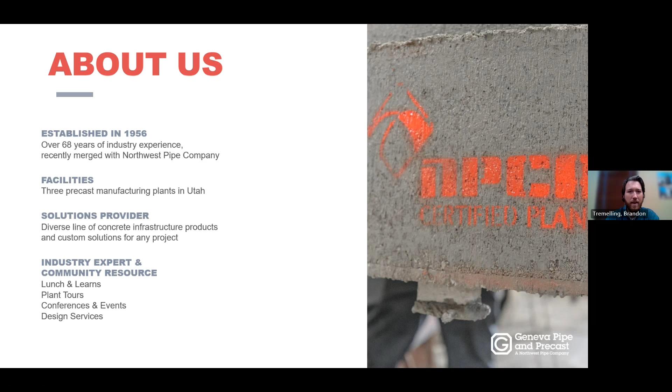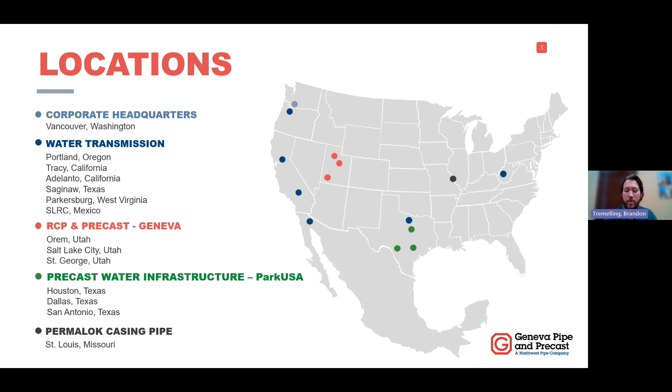To get started, I wanted to mention a little bit about Geneva Pipe and Precast. We are a precaster that recently was acquired by Northwest Pipe. We've been around for nearly 70 years in the industry, providing various precast concrete solutions as well as innovative technologies to accompany some of that precast infrastructure. We are part of a much larger company spread across the United States, which provides interesting opportunities for us to collaborate with other engineers and agencies from around the country that may have unique challenges we don't normally deal with, providing opportunities for additional growth and innovation.

Today we want to talk specifically about innovation in the area of concrete corrosion. The portion I'm covering is specific to the science of concrete corrosion, the H2S or hydrogen sulfide corrosion that eats away at concrete. We'll talk about the impact of this problem in our industry, as well as more historical approaches for preventing and possibly rehabilitating structures that have been affected or may be affected by this problem. At that point I'll hand the presentation to Elena, who will talk about innovative advancements for both new installation and rehabilitation of existing infrastructure.

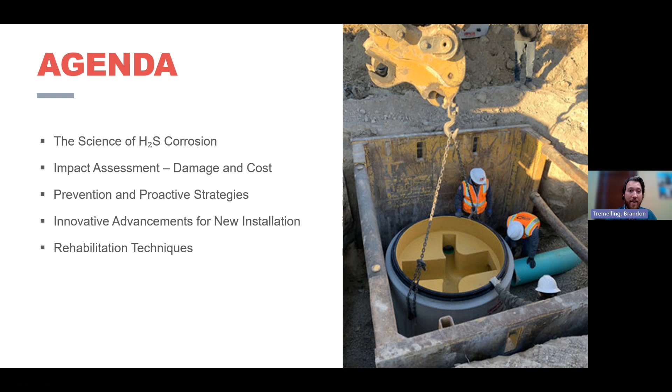And with that, I'm going to jump right into it. So microbiologically influenced concrete corrosion is first and foremost a mouthful, I like to say. We generally condense it down to the acronym MIC, which we'll primarily be referring to it as from here on out. It is the leading cause of deterioration in concrete sewer systems. It's not necessarily indicative of poor design or anything wrong with the wastewater makeup itself, but it is a natural process, and as a natural process it needs to be planned for, inspected for, and sometimes we do things to try to address this problem.

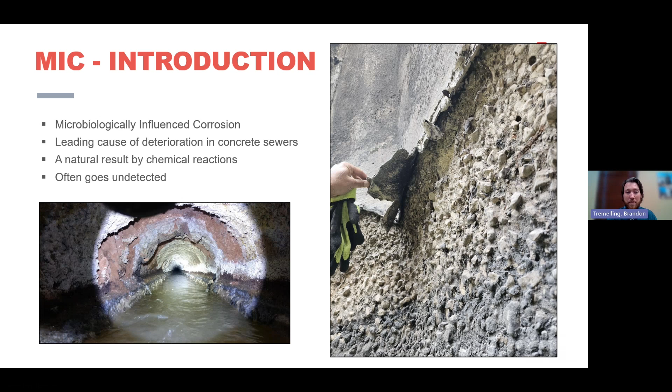On the surface level, as in that photo to the right, you can see higher up on the wall it looks like the method used to protect this concrete structure looked fine on the surface, but until you peel it back and look underneath, sometimes we get a situation where a Band-Aid solution may not be the right approach. So it can sometimes go undetected, which leads to greater problems.

Now the actual chemical process that takes place is that the microbes inherent to the wastewater accumulate in the biofilm under the water line. In that biofilm, they have all the time in the world to break down the organic carbon native to the wastewater and produce acids. Those acids, through various factors, can become airborne. And once airborne, they react with oxygen and moisture to eat away at the components of that concrete structure.

That process eats away the concrete layer by layer. In this photo you can see almost little sheets of concrete in that deteriorated pipe, showing how layer by layer we can eat away at the wall thickness of our structures, eventually exposing the reinforcing steel and possibly leading to collapse of the structure, which can lead to all sorts of problems, including health concerns, safety, and so on and so forth.

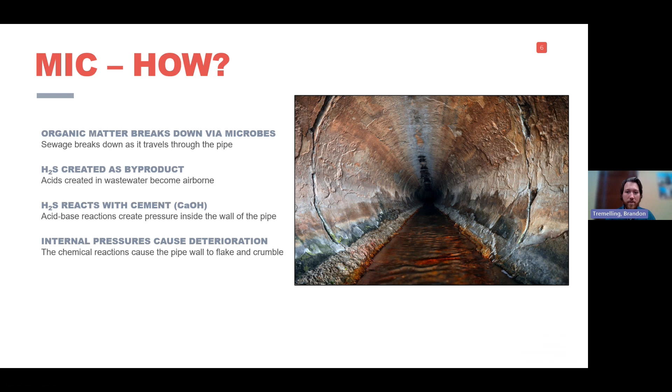So like I mentioned, there are various factors that can cause these acids in the wastewater to go airborne and then attack the concrete. The first and foremost of those factors is heat. The hotter it is—and when I talk about heat, I'm not talking about drastic temperature fluctuations, I'm talking about slight increases that bridge that gap to the energy of activation, or the required energy for these chemical reactions to take place. So if we have slightly warmer wastewater, we're more likely to see those acids go airborne.

The next one is turbulence. If we're aerating the water, that's going to cause those acids to get swept up into that aeration and then enter the atmosphere. The longer the transit times—this one's a little tricky because it's often out of our control—but the longer the transit time, the longer those microbes have to build up the concentrations of the acids in the wastewater and also in the air in the pipe.

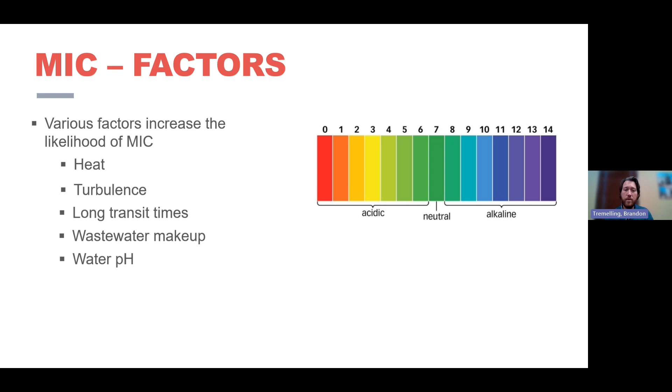Now that we've covered a little bit of the science, I want to spend some time talking about actual disasters and case studies that demonstrate the impact of this problem.

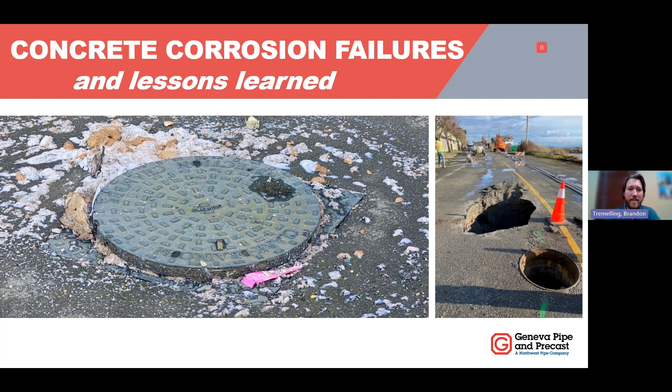The first one I want to talk about is a relatively large disaster as far as sanitary sewer overflows go, and that is the Jackson, Mississippi disaster, where a lift station or pump station failed after a concrete pipe collapsed due to corrosion. The overall volume of wastewater that spilled was 19.7 million gallons, which is only what was measured—it wasn't the total volume, just what they could account for when they found that the wastewater was flowing directly into the Pearl River that runs through Jackson, Mississippi.

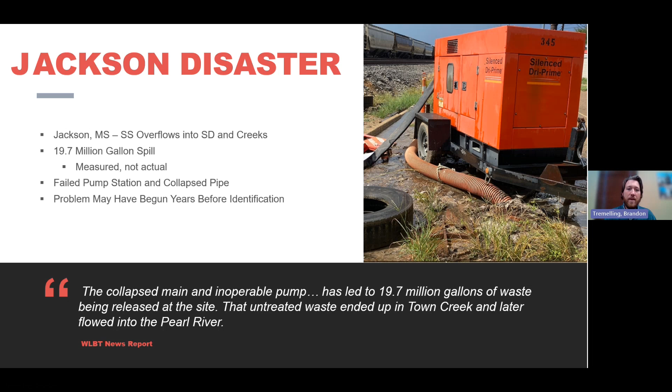Further in my research of this specific case study, I found this quote, which says that in 2020, more than 520 million gallons of SSOs occurred. And I don't know if you call this progress, but two years later they'd cut that down to only 216 million gallons, which is by any measure an environmental disaster.

Now, what had taken place was that because Jackson, Mississippi was being more reactive than proactive in the work they were doing to maintain their system, they quickly got to the point where they realized they could not keep up with the disasters as they were taking place, and very quickly ran out of money. When I say that, there was a study that came out several years ago by FEMA showing that for every $1 of proactive care spent, it's equivalent to $6 of reactive care.

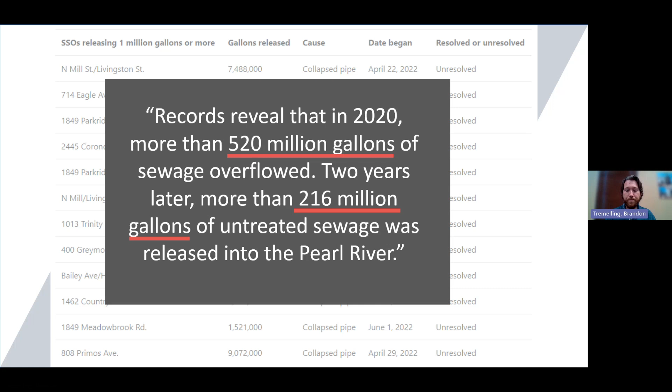So in cases like Jackson, Mississippi, where there were all these disasters taking place and the great increase of cost to deal with those disasters, the city ran out of money and lost the ability to maintain their own system.

More locally and on a smaller scale, which might be more relevant to engineers in rural areas, this was a photo I took myself at the headworks of a local wastewater treatment plant, right after I gave a presentation much like this one. I turned to a group of operators and asked, how many of you have seen MIC in your system before? This was a group of seasoned operators, and they all looked at each other and at me and said, we haven't.

And I said, really? How much of your system is concrete pipe? And I'm not just talking about manholes, I'm talking unlined concrete pipe. And they said about 80%. It wasn't until one guy at the back said, maybe I've seen something like that. So we walked right outside to the nearest manhole, since it was at the treatment plant, popped open the lid, and saw what you see here.

Just to be clear, for those not super familiar with concrete infrastructure, concrete isn't meant to curl away from the walls like that. That's definitely a significant case of corrosion. This is an example I like to highlight because if you're not looking for this problem, it's easy to miss. In this case, these operators, even though they'd been dealing with concrete infrastructure in their system for decades, hadn't realized this was impacting the resiliency and sustainability of their infrastructure.

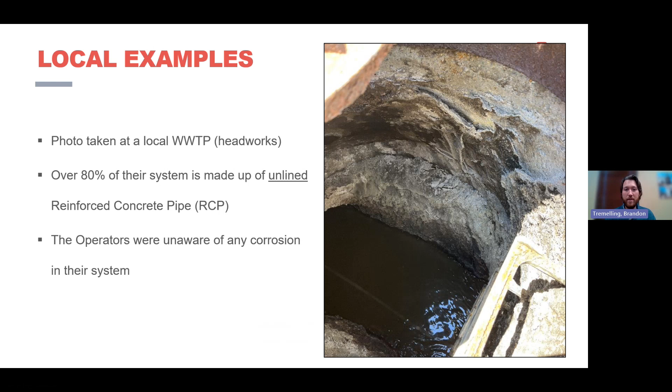So mentioning costs and these studies by FEMA, my company put together a research study some time ago where we analyzed different methods to treat this problem, either through prevention, protection, or things like that. I've left the units off of this, but I want to invite you all to think for a moment about what it means when we use the phrase life cycle cost.

If we're putting in a system or component that we expect to last for the lifespan of the infrastructure it's connected to, oftentimes we look at infrastructure with maybe a 100-year lifespan. For concrete, we generally look at a 100-year lifespan. So if we're putting in a structure that has the possibility of experiencing corrosion and degradation, then whatever we're doing to prevent it from corroding and deteriorating should probably also last 100 years.

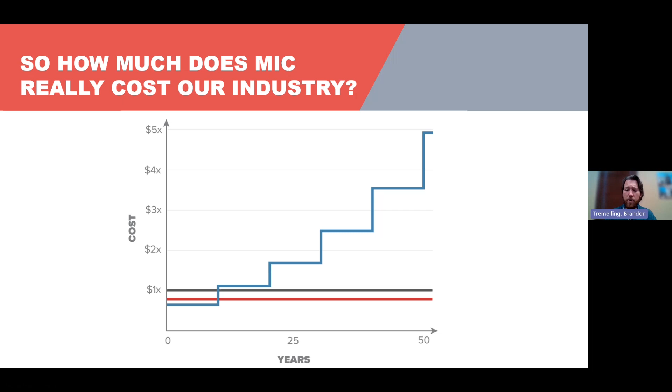Now, in trying to quantify some of these things, my company, looking for solutions, decided we wanted to identify how big of an impact this is to the US market, for example. So just as a quick, more rhetorical question, think to yourselves: how much would you guess the US spends annually on the rehabilitation and replacement of concrete sewer pipes? As you think about that and the scale of it, even $4 billion is a pretty enormous number.

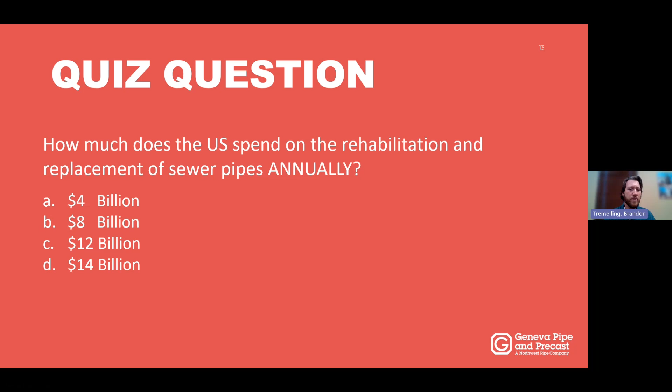And to answer this question, we did what any modern scientist or research engineer would do, and of course we turned to Google and found research studies from all over the world, from Canada, Austria, China, and we were rather surprised to find that here in the United States, it's a $14 billion industry dealing with the rehabilitation and replacement of deteriorated sewer pipes. So a massive problem that we decided we wanted to try to be a part of, to address and provide solutions for our industry and local markets.

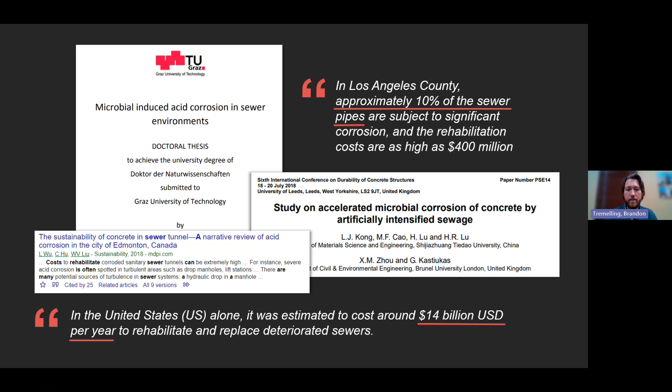Looking specifically at this research study we were working on, we identified a few standard approaches to treating this problem. Probably first and foremost are field-applied coatings. Also, polymer concrete has seen a more recent rise. And finally, lined concrete, which Elena will cover more in depth.

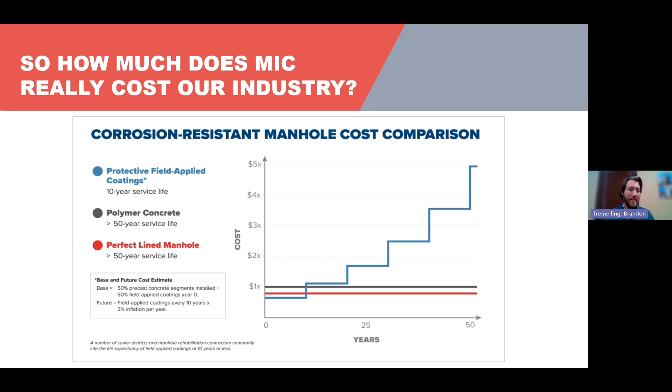But I want to introduce this concept now where we talk about life cycle costs. If we're trying to put a component of our system in, are we making those decisions based on what makes the most sense for the lifespan of the structure? Because at Geneva Pipe and Precast, our goal is that if you're going to put in a new piece of infrastructure to address a problem, or rehabilitate a structure that's had a problem, you should only ever have to do that once.

So, looking at corrosion, how do we identify if we're seeing corrosion in a system? Now, there's a few telltale signs.

Going back to this photo that I took, if you see white or black discoloration, white is actually the formation of gypsum, which is the byproduct of the concrete corrosion. Black is the accumulation of sulfides. So in this photo, you can see some white areas, some black areas.

If you also see yellow, that can also indicate some sulfurous compounds. The smell of rotten eggs indicates septic conditions that really cause little microbes to thrive.

Finally, if you're seeing flaking or pebbly or curling textures, a kind of rough concrete surface, that's not necessarily a problem. But if you're seeing some of the aggregate or gravel exposed, that indicates there has been some degradation of the concrete and that wall thickness is starting to get eaten away. So that also can be an indicator.

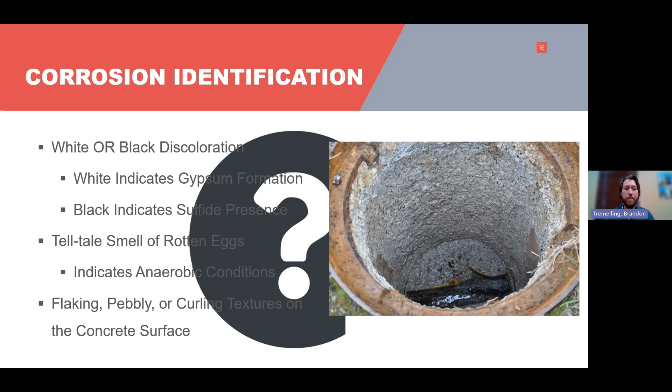Finally, here's a video that I also took of a rather severely deteriorated manhole where truly just with the brush of a hand, this concrete is just falling away. So it can get to some pretty severe conditions.

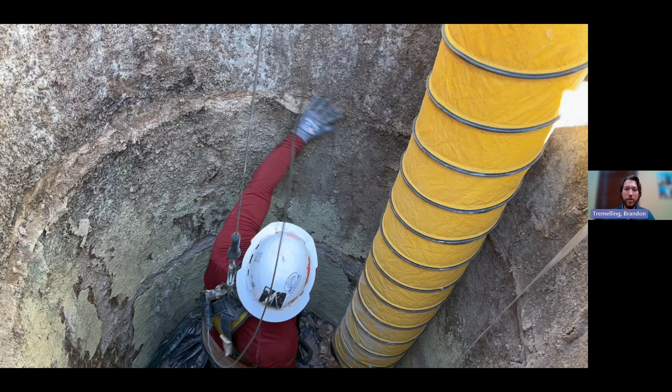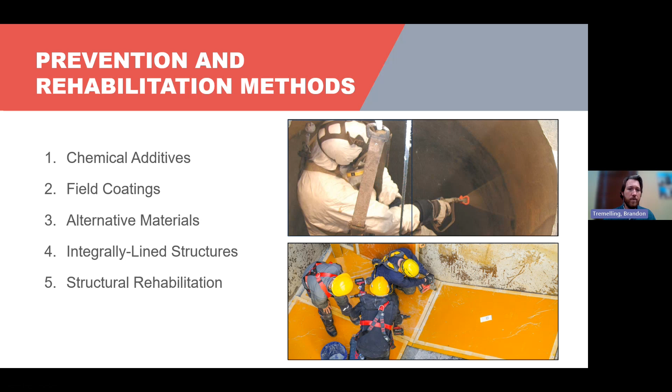Now, as I mentioned, we've got some prevention and rehabilitation methods that I'm just going to touch on. I'm only going to talk about the first few, but generally we've got chemical additives, field coatings, and alternative materials that don't react with the corrosion. Then we'll talk about lined structures and structural rehabilitation, and that's where I'll hand it off to Alena.

So the first is chemical additives, and this can be either more of a concrete admixture or something that is sprayed on top of the walls as a very temporary measure. As a concrete precaster, I can tell you there's a reason why we don't use concrete admixtures specifically for concrete corrosion. And the reason is because essentially the reaction is like an acid and base reaction.

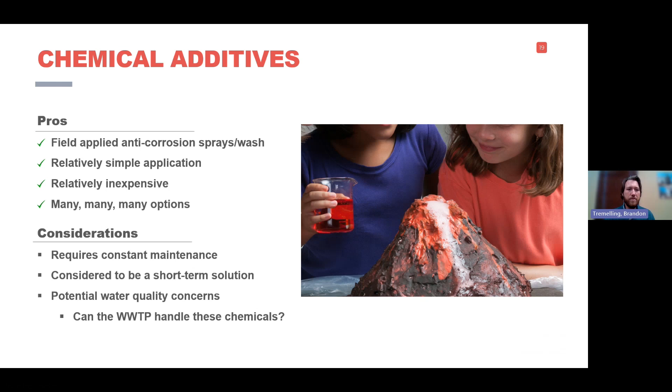So like your elementary school volcano science project, if we are adding more bases to the concrete, then there's more for the acid to attack that isn't the concrete. But eventually, given enough time, those bases will get eaten away and the concrete's going to be targeted. So generally we try to stay away from chemical additives because they don't hold up to significant corrosive potential.

The field applied coatings is an interesting one, very popular, can be potentially cheaper initially. There's many options to choose from. It's pretty dynamic. A specific agency can choose what they want and say, we want this thickness and this type and this application, things like that.

So that's good. But generally, it has a lower lifespan, requires ideal conditions for success. And as you can see in this lovely Jackson Pollock painting here, oftentimes it doesn't do too much to protect the concrete underneath if there's even a pinpoint access point for those acidic components to get in and behind it.

Now, this is actually a best case scenario because it's clear that there was corrosion going on behind this field applied coating. But in some instances, we can have this situation where, as I demonstrated earlier, you can see higher up on the wall it looks like everything's fine, but behind it actually is a much more severe corrosion problem.

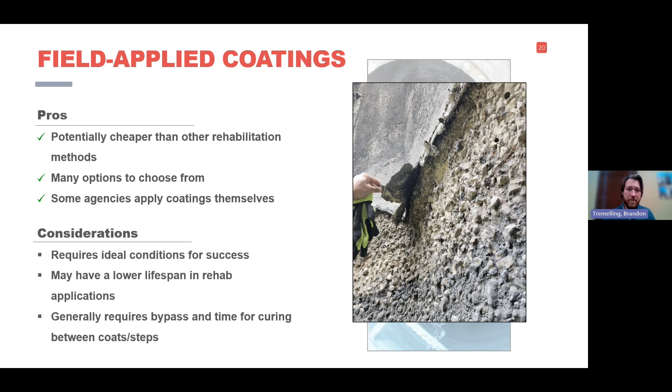Finally, alternative materials and inserts. This is an option for essentially removing the cement from the concrete and introducing an additional material. In this case, we're talking more about polymer concrete, which is non-reactive to the corrosive elements. Generally, it performs pretty well, but for rehab isn't a total structural solution and also can be a little bit more expensive.

And with that, I think I'm ready to hand things off to Alena. I'll be back for Q&A at the end.

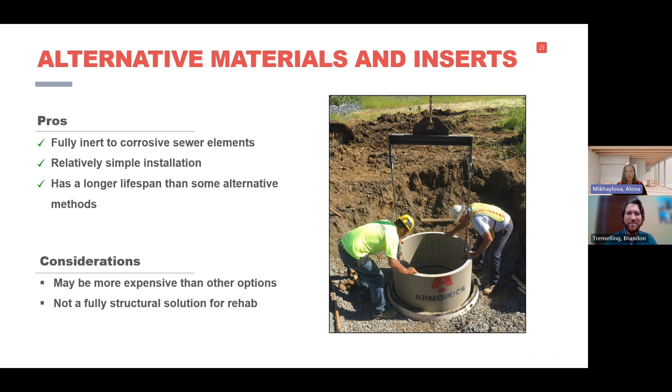Brandon, thank you for the great introduction.

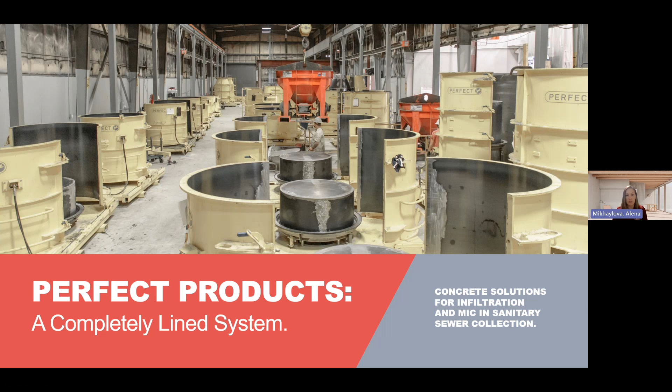So this is a picture of our facility where we started manufacturing corrosion-resistant solutions. We had this facility for a long time. Geneva Pipe has existed for a long time, but corrosion-resistant solutions came along in 2019, 2020. We purchased technology and equipment, so we're now able to offer corrosion-resistant solutions here in the US throughout the country. Not just where our facility is located in Utah, but we also have capability of making products in other parts of the country.

So we offer lined concrete, which is not a new solution. However, our product has a few more innovative solutions as compared to traditionally lined concrete.

You may be familiar with T-lock liners that have been used since the 80s. It's a very popular solution for protecting concrete, specifically in California. I know some Texas markets also have PVC lined concrete specified in the specifications for various agencies.

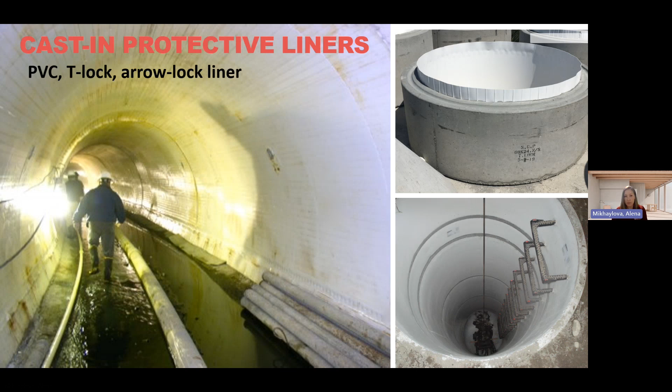So basically, there was a PVC liner. On the right top picture, you can see what kind of anchoring system it has. It has parallel running ribs that, when concrete is poured in the form, embed into the concrete, creating a locking system. With that product, you could line cast-in-place structures, but you've got to support them. You could also line manholes and pipes. So that's the idea behind lining.

T-lock had one issue because it had parallel locking anchors. Water could get trapped behind the liner and create bubbles. Something to keep in mind, and engineers don't necessarily always think about it, is when you have high groundwater, the water gets trapped behind the liner and the liner may fail.

This is one of the major mechanisms of how epoxy or spray-on liners fail. Typically, a spray-on liner is attached to the concrete through chemical adhesion - it's not reinforced, not mechanically embedded. So when water gets behind the liner, in most situations you're going to get water behind it, and it starts cracking. Because it's brittle, it starts cracking and you gradually get a failure behind the liner. Once you have cracks, gases will penetrate between the liner and concrete, and the concrete starts deteriorating. So it's very important to have something either inert that doesn't react with H2S gases, or you've got to have mechanical embedment for a lasting solution.

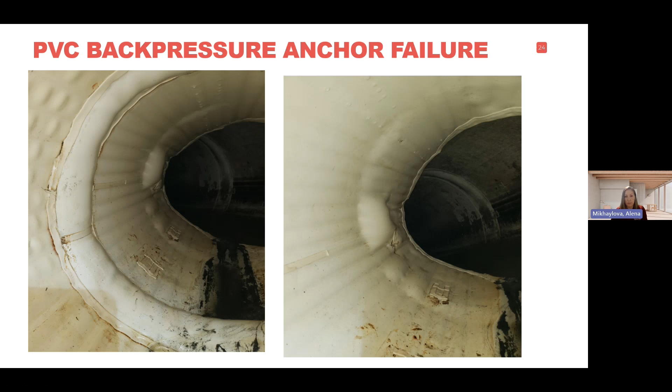So we offer HDPE lined concrete. Traditionally with HDPE liners, you weld the tubes, you cast them into pipes or manholes, and the anchoring system is slightly different than T-lock, as you can see.

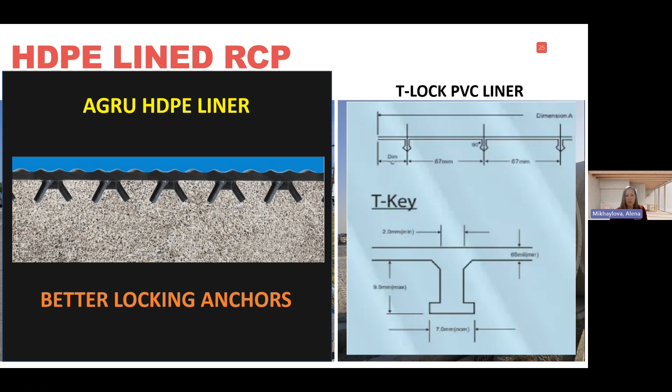Our AGRU liner has V-shaped, independent anchors that are embedded into concrete. So if one anchor fails for some reason due to water pressure, you have a hundred other anchors holding that liner, so it's not going to peel off. With the T-lock liner, it was a little different because you had parallel running anchors, and if water got behind the liner, it could tear the whole liner out because they are dependent on each other.

Traditionally welded, lined RCPs or structures - once you cast them and install them, somebody has to come in and weld the joints between them, because you want continuous lining between the joints. So a welder of the right size goes inside the pipe and welds the joints around it. It doesn't stop there, and it's a very labor-intensive process. For smaller pipes, it gets even harder for the person to fit inside.

Once it's welded, you've got to have some sort of testing to make sure you have a thorough penetrated weld, to make sure you don't have any pinholes so gases don't get in. This was one of the weak points in T-lock - there was no way, except for vacuum testing, to tell whether you had a weld without a defect. So sometimes agencies go in, and once they pull the liner at the failure points, they see there is corrosion behind the liner.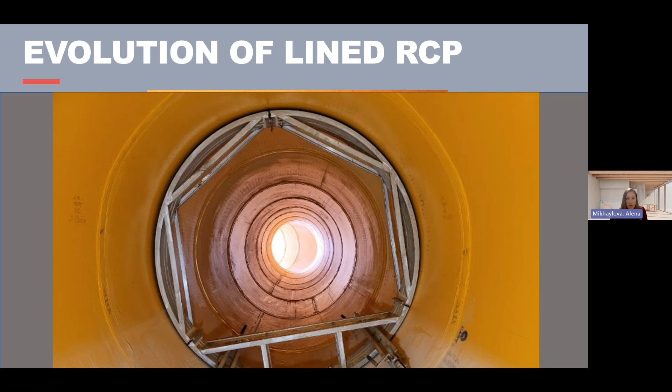So with the yellow liner, the AGRU liner, there's now a welding strip with metal backing, so you have an option besides vacuum testing the joint - you can actually do spark testing to make sure you don't have any penetrations. So our pipe removes all the risk of a bad weld and speeds up installation because you don't need to weld this type of product.

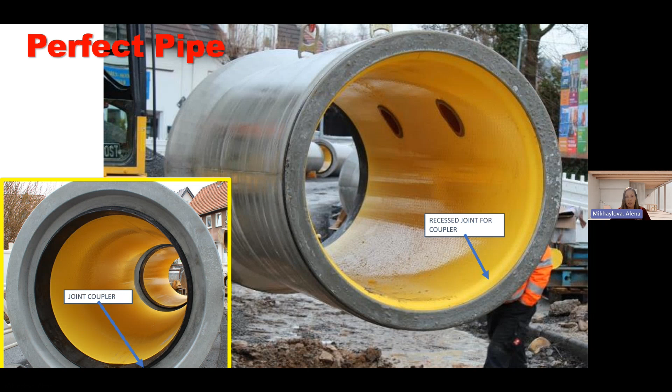So our product is Perfect Pipe - a traditional lined RCP with HDPE liner using those V-shaped anchors embedded into the concrete. Once you install these pipes, the beauty of it is you don't need to weld it. On the bottom left you see there's a black coupler - once you install the pipes, you can connect them just like a regular RCP that you see for storm systems.

The anatomy of the pipe is on this slide. So you have the RCP. It can be made in different classes, class 3 through class 5, depending on your loading conditions, or it can be special designed if you need special loading like construction or aircraft. We install this black coupler made out of corrosion-resistant material, with double tilting edge gaskets, two of them, sitting on this black coupler. We insert that coupler into the pipe, and it's delivered to the job site, so the contractor doesn't have to mess with putting the gaskets on or equalizing it. So the process of installation goes really fast.

So you get the strength of the RCP, but you also get a corrosion-resistant solution, and you don't need to weld it. So you're speeding up the installation and reducing the risk of a bad weld. And of course, that way the agencies can save money.

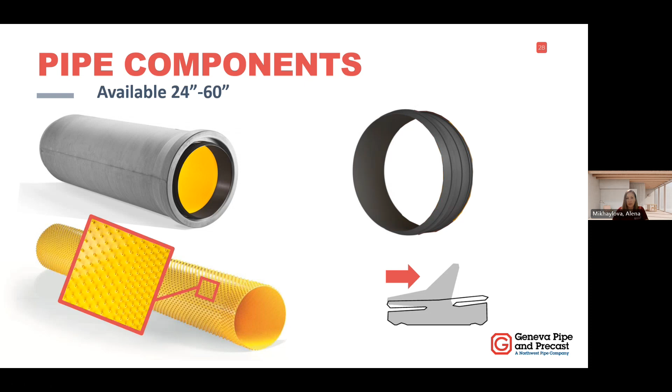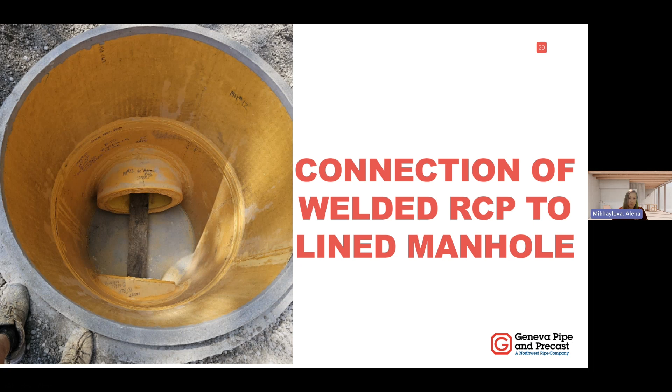Just as an example, traditionally lined RCP wouldn't have that connector, the black connector, so they would have to cut the pipe and then stick it into the manhole, doing all kinds of complex welding. For that, you're hoping that your welder is really good and certified, so you don't have any defects in the weld. Obviously, this particular picture has really good welds, looks like it.

As far as connecting to the manhole, this perfect pipe can be connected to any new manhole. We can make the FRP bell insert that whoever makes the manhole can embed it or cast it into the structure. Then once you have this bell connector, you have this perfect pipe coupler that you insert into it, so your pipe will smoothly connect to the manhole.

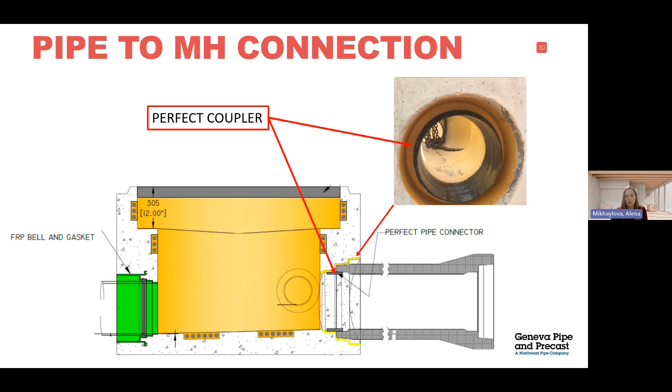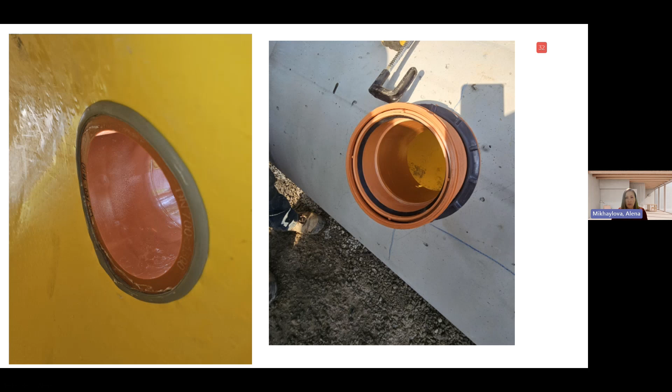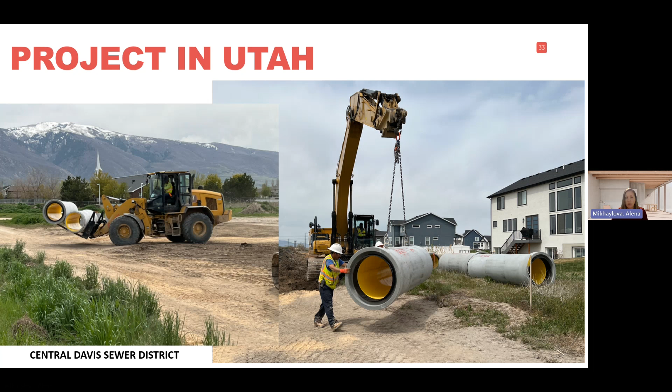Besides perfect pipe, we offer an entire solution to have a fully corrosion-resistant system, not just a pipe, but also lined manholes. So you can have a fully corrosion-proof system.

One thing I wanted to mention about perfect pipe: they come in 10-foot lengths and available sizes from 24 through 60 inches. If you have a pipe above 60 inches, you still have to traditionally weld it in the field. Why did we pick the smaller sizes, and why are only the smaller sizes available? Well, because those are the sizes where human entry and working inside the pipe is more complex. Imagine going into a 36 or 24-inch pipe and trying to weld the joints. With perfect pipe, you don't need to worry about it—you just install it, and all the work is done from the outside of the pipe. That's the reason perfect pipe is superior to traditionally lined HDPE-lined pipes—we don't have to weld the joints.

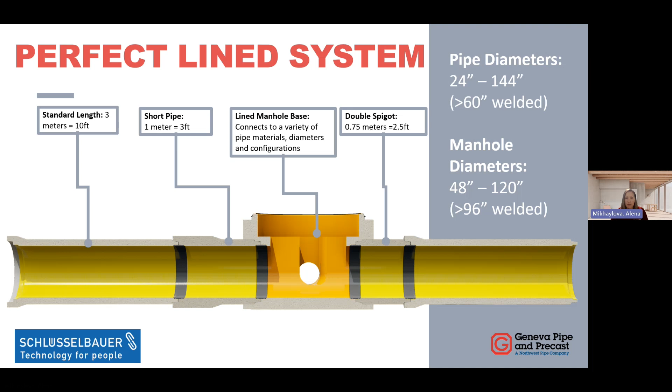And for the manholes, again, we offer manholes that are fully lined from the base all the way to the lids. They don't need welding either, just like our perfect pipe, which speeds up the installation for the contractor and removes the risk of having to weld the joints in the field. I will talk about these products in the next slides.

And then the top portion, the riser, is a little bit lighter liner. It's because it's lined with HDPE. You may be wondering why the bottom is lined with FRP and the top is lined with HDPE.

It's because the bottom, the base, is a complex shape. You can't just cut it up and start lining the channels and then weld it, because you don't want to have those joints or welds. So we line it as one piece, so you don't have any penetration points or seams that gases can go through. So complex shapes are lined with FRP and simple circular shapes are lined with HDPE liner.

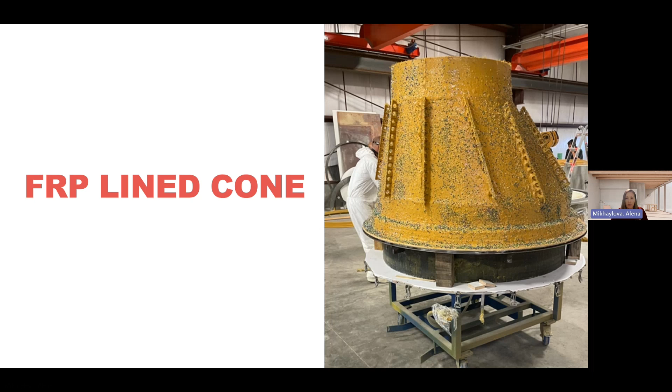We can also line the cones. First we manufacture the cones and cast it into the cone form. So you can have either a lined cone or lined flat lid, depending on what you use.

A little bit about the FRP material. There has been testing done where FRP lined manholes were installed, and then one of the manholes was dug up and some samples were taken. After 20 years in service, they measured the thickness of the liner. They took several core samples, measured the thickness of the liner, looked at the concrete under the microscope, and found there was no deterioration - no significant reduction in the thickness of the liner itself and no damage to concrete. That shows you this material is not just abrasion resistant, but also protects concrete really well.

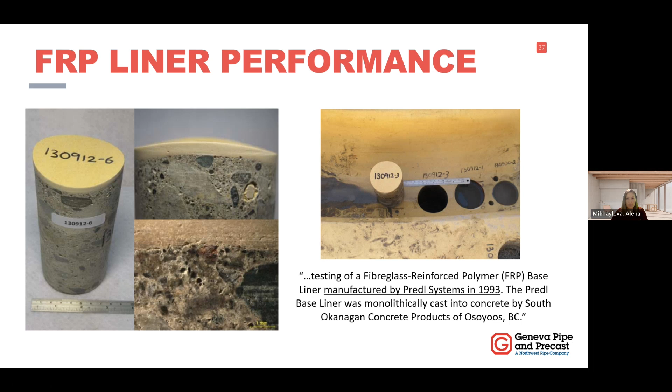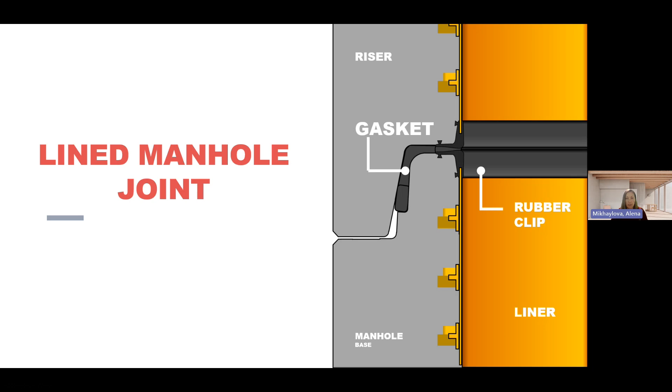This is a picture of the gasket that I was telling you about. The yellow part is your liner anchored in, and then you have a gasket that goes all around. It seals on the top part of the spigot and all the way in the annular space in the joints, so it provides a seal from the top and on the side as well. The gases cannot go in between the liner and concrete, which is a great feature you don't see a lot of.

And we do offer a 50-year warranty. If you think about epoxy spray and liners, typically they don't get a lot of warranty because the life cycle is not that long, but we are so confident in our product that we offer a 50-year warranty, and these concrete manholes have a 100-year design life.

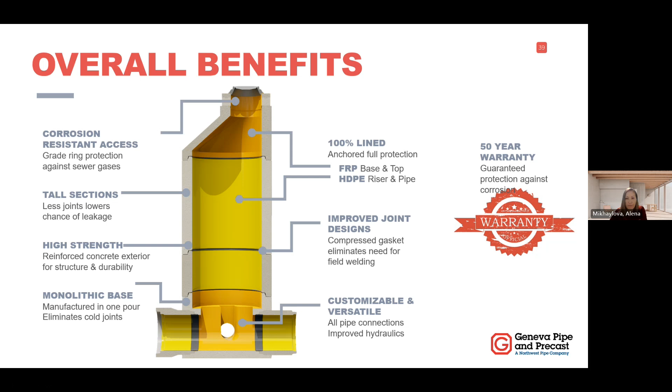If your agency for any reason uses steps, it's possible we can make them, but we do not recommend making steps. Now we see more and more agencies walking away from steps, and they're just lowering maintenance people through a tripod, which is a safer solution.

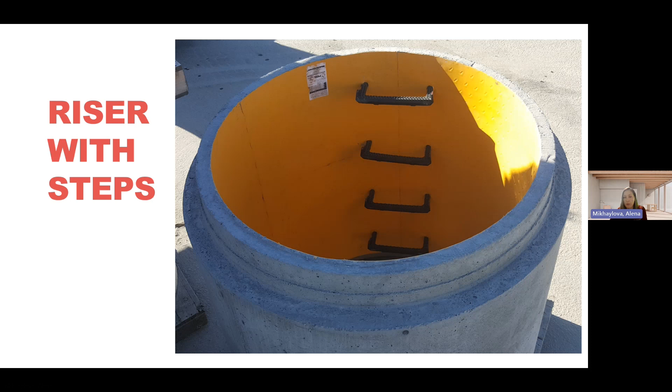First of all, you don't know the condition of the steps unless they're corrosion resistant. Plus, when you install the steps, you're introducing additional penetration points where you have to weld around every single penetration, which creates additional possibility for pinholes and possibly gases getting in.

Also wanted to talk a little bit about connections of the pipes into the Perfect Lined manhole. You can have an option of using the boot - this is a traditional way. Not every agency likes that. We see more and more, once they learn about our option and what we offer, they walk away from the boot because they think our option is better.

You've traditionally seen boots used when you connect to the structure. We would line the opening in the manhole, and then you insert the boot into the lined opening, so you don't have any points of gases getting in. One of the problems with this is on the outlets, when the effluent is going through, it can get in between that pipe and the annular space of the boot, which can create additional odors and effluent standing there.

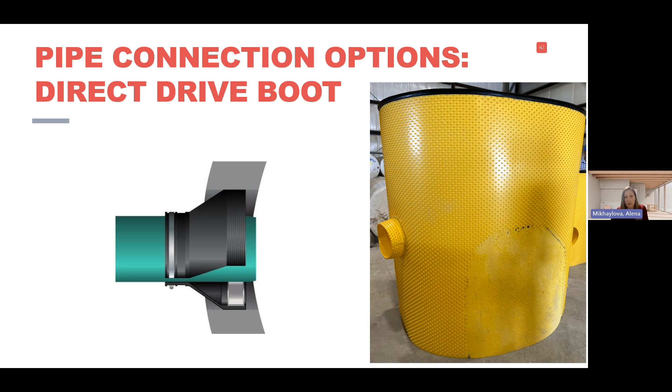So some agencies just grout the space, and then it becomes a maintenance item because eventually the grout is going to be eaten out and you will have to regrout it again. So our option is to use rigid connectors.

So not only do you get watertight joints with gaskets, but if you've been using them for a while, you'll just be able to look at the connector and see, okay, this is SDR 26 or SDR 11, SDR 35.

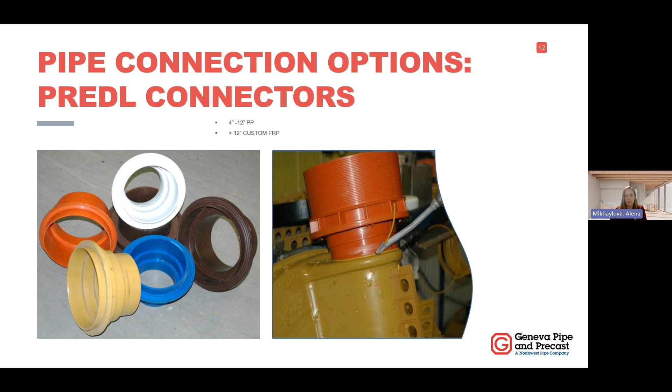We integrally cast them into the manhole, so any pipe can be seamlessly connected. If we don't have the right connector already pre-made, we'll make the connector out of FRP to fit the pipe. We can make it for RCP, for fiberglass pipe, for any type of pipe you can think of, or we can use the boot.

So that's our products for new construction, and now I'm going to move over to our rehabilitation solutions, which we see a lot of demand for because our infrastructure is aging, and sometimes replacement isn't always economical, so rehabilitation becomes a more attractive option.

So we have solutions for rehabilitation of round structures - that's your manholes, your lift stations - and we also have rehabilitation products for square structures. These are permanent solutions. It's not a lipstick fix where you rehabilitate and then have to come back in 7 or 10 years to rehabilitate again.

So first, I'm going to talk about our rehabilitation of manholes - all the agencies have some amount of manholes that need to be rehabilitated. This is structural rehabilitation, not just permanent but also structural. This manhole can support the HS20 load on its own. So if you have a severely deteriorated manhole, instead of digging it out and replacing it, you may want to consider rehabilitating with this option.

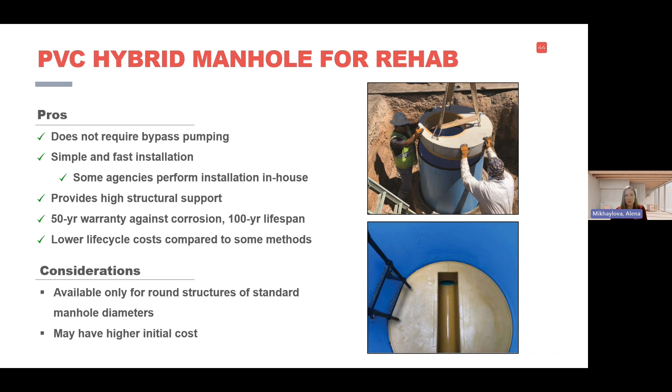And the second one is the FRP panels. These are square, corrosion-resistant panels that you mechanically attach to square structures where you have straight walls. This solution is easily customizable and lightweight. You don't necessarily need to remove the top lids - you can directly feed it through the hatch or through the opening that you have. They can be cut and customized in the field.

So with the panel solution, we offer a 25-year warranty and 100-year design life. The panels consist of a honeycomb core, which gives the rigidity to these panels, and it's covered with FRP, fiber reinforced plastic - the same material we use for lining our Perfect Line manholes and making the bases, lining the bases for it.

So these panels provide rigidity, and because of that, once you mechanically attach them to the wall, you can grout behind it. So if you have severe deterioration of the wall, or some loss in thickness of the concrete, you can use these panels basically as bracing - a support system for restoring that thickness of the wall. Typically when you line or re-pour the wall, you have to brace it with something like metal or wood panels. These FRP panels can serve you as that, so you don't need additional bracing.

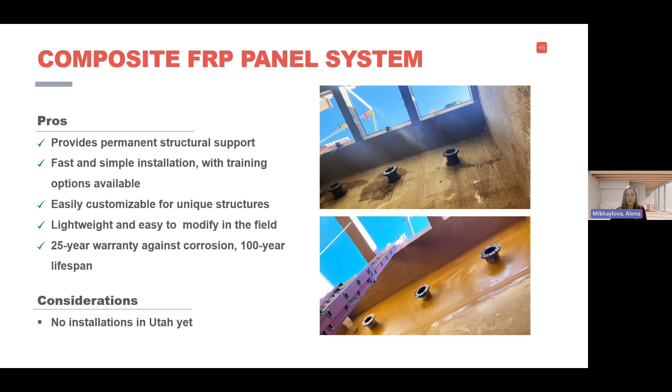Once you install it, you seal the seams and then test your structure for water tightness.

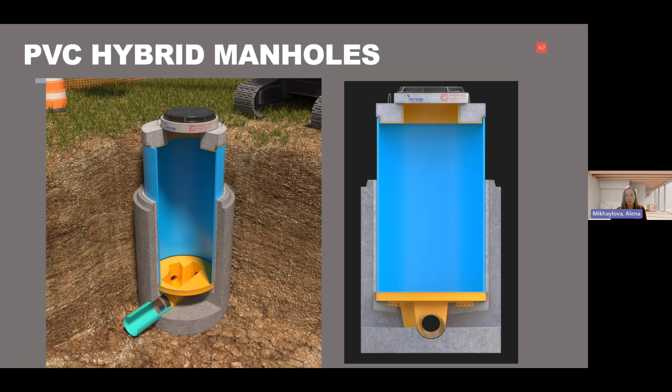Next product is PVC hybrid manholes. That's for round manholes, as I mentioned. The idea is without removing the existing manhole, you can slide the inserts into the manhole, then slide the riser and cover it with a lined lid.

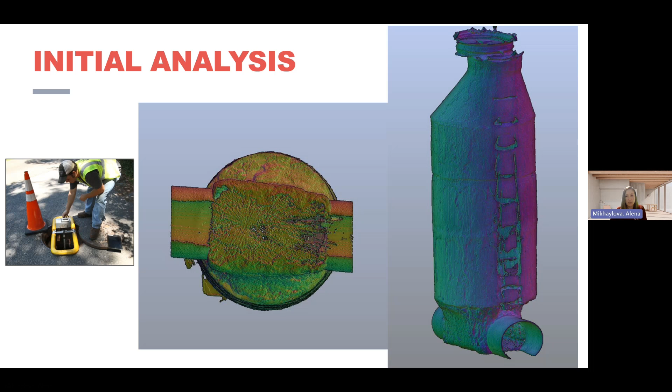This is a project from Surprise, Arizona. First, we can scan the manhole to determine the configuration, even if you have odd troughs, based on a digital model of the manhole. And based on that digital model, we create a custom fit liner.

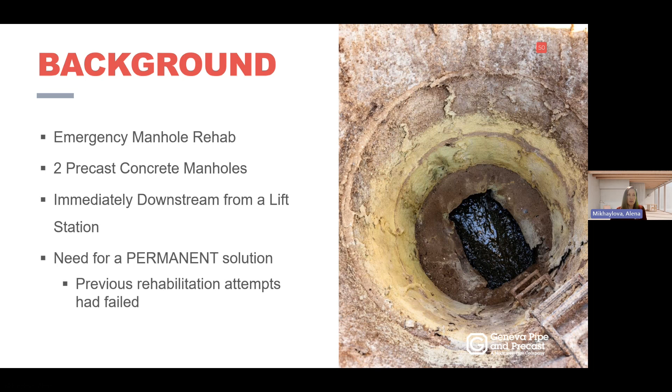For that particular project, we had 2 concrete manholes that needed to be rehabilitated. Time was of the essence, so we offered a solution that does not need a bypass. The contractor was able to rehabilitate 2 manholes within 2.5 days.

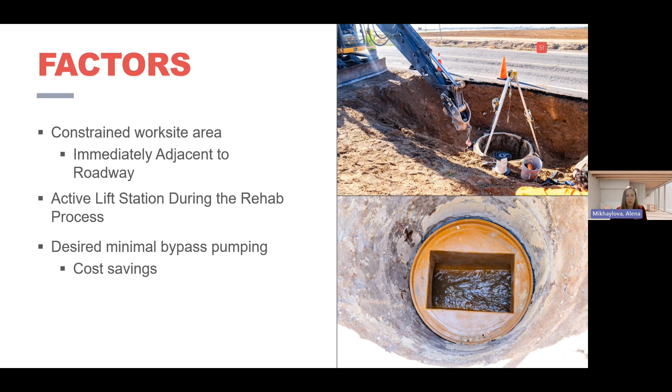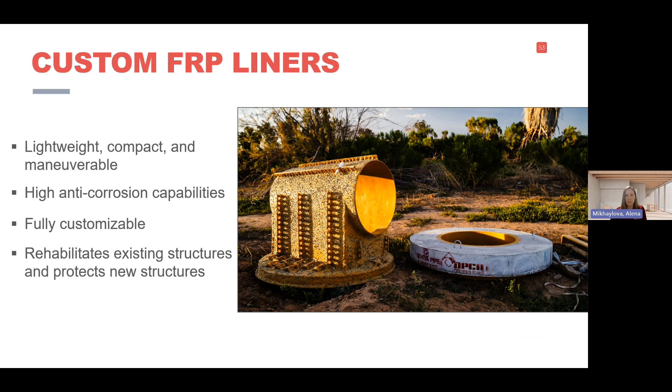Those 2 manholes were downstream from the active lift station. Once we scanned the structures, we custom made the liners, and they were delivered to the job site. This liner is made out of FRP. It's corrosion resistant and also highly impact resistant, so if you drop a hammer, it doesn't necessarily chip or break.

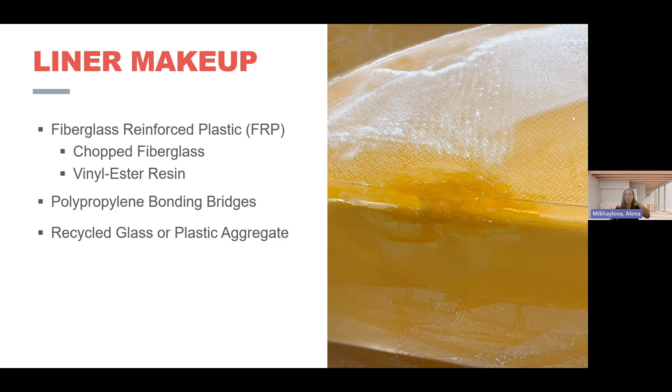This is a picture of the repair process. If for any reason you have a chip or a crack, the repair process is not very complicated. With a little bit of instruction, field crews can easily repair it. No welding certification is needed, but with proper instructions, the liners, if damaged, can be repaired.

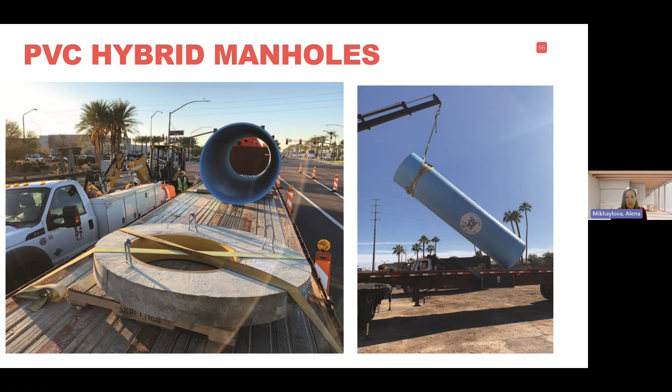At the job site, you can typically self-perform. If you have several people on your team, they can install the manhole in 1 or 2 days, as long as you have the right size lifting devices.

You've got to prepare the surface. You don't want any debris going into the sewer, so you want to have lining at the bottom to capture all the debris. Pressure spraying is not necessary, but you want all the loose material off the walls. Once it's cleaned, you don't need etching or any special preparation.

Once the liner is in place, you grout behind it, and once the base liner is in place, you put the mastic and lower the PVC riser. Once the PVC riser is in place, you want to make sure it's perfectly vertical, and you're going to have this annular space.

One thing I wanted to mention: when you use this solution, you will lose one diameter size for your manhole. For example, a 60-inch diameter manhole will become 54. Typically it's not an issue as long as those are maintenance holes, as long as a person can fit in there. The problem may arise if you have equipment there, like for lift stations, and if you're reducing one diameter size, you want to make sure your equipment still fits. If so, you'll have to determine whether this is the right solution.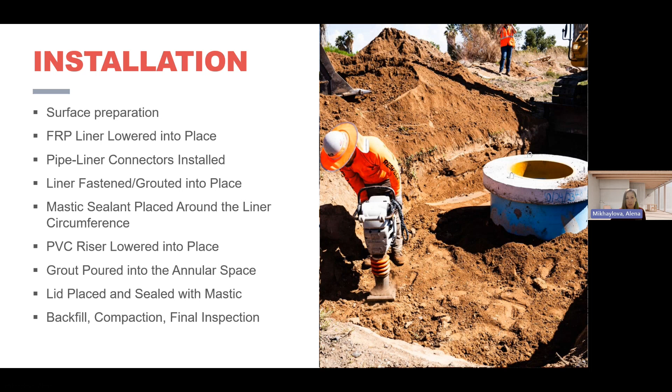Once the riser is in place, we make lids specific to fit the risers. They're lined with FRP liner, so they're also corrosion resistant. Once they're installed, you backfill and put it back into service. So you basically have a brand new manhole that's going to last another, hopefully, 100 years if you don't have to dig it out.

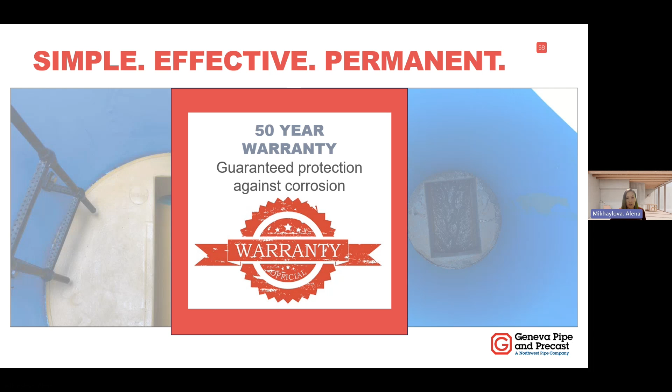There's a possibility to install a ladder again inside—not steps, mostly a ladder—so you have the least amount of penetrations if you really need it, though again we do not recommend it. And we offer a 50-year warranty.

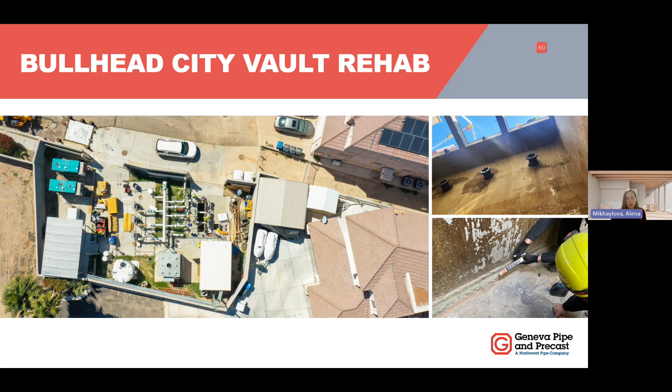I did talk about these FRP panels. This was one of the projects we did in Bullhead City, Arizona, where we used FRP panels.

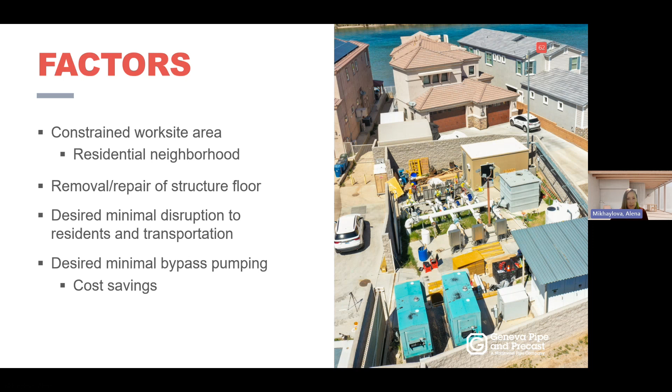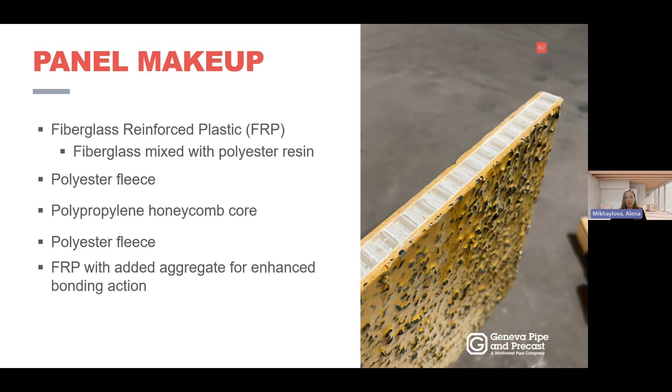So right now we're on the fourth wet well. The owner liked it so much, and they were tired of going back and respraying, because the cost of respraying, shutting down, bypassing is tremendous. So they decided just to get it done once, so they don't have to ever go back again. With that, I'm going to finish the presentation, and we'll open up for any questions.

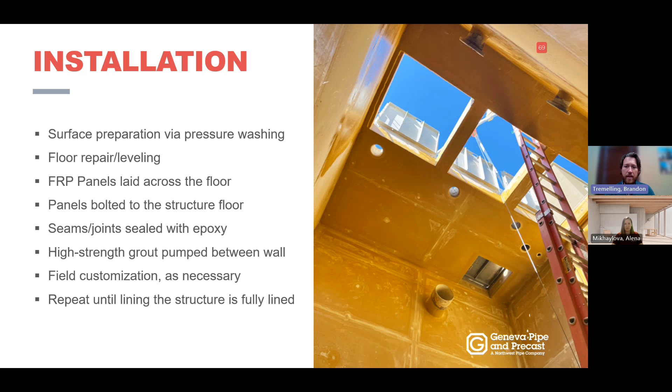One of the questions was, what is the minimum pH and maximum temperature these liners can withstand? We generally recommend the FRP liner for wastewater temperatures at or below 160 degrees. The FRP material is the liner expected to actually come into contact with wastewater in most applications, either in the base of a manhole or through our FRP panels, which are shown on screen. So 160 degrees generally. As far as minimum pH, that's an excellent question. We've tested these liners with a 20% sulfuric acid solution. The actual pH is highly dependent on atmospheric conditions, temperature, and things like that, but if somebody would like a specific pH reading, we can reach out and provide that.

It's got to be a combination—where you have increased temperature and lower pH, it's going to be a more severe condition. So we do need to know what's the temperature of the effluent and your pH.

The next one, somebody asked, is the Perfect Pipe for storm sewer? Because generally concrete pipe is used for storm drain systems. That's an excellent question. Generally, this Perfect Pipe is used for sanitary sewer collection systems. The idea is to provide an option that is both structural, in that it can handle excessive loading and can be designed for rather extreme loading, as well as cases where you don't have much cover over the pipe but will have high loads, or something that's really deep in the ground. We can provide a structural solution that's also corrosion resistant through the integrated liners.

Nothing precludes you from using these pipes for storm drain. If you have root penetration issues, HDPE liner is highly resistant to root penetration. And if you have high abrasion conditions, HDPE liner on its own has one of the highest abrasion resistances of all materials used in water and wastewater systems. So my personal opinion, you're probably going to overpay for your storm sewer, but you can definitely use it if you have special conditions. And that's not even to mention the joint performance—for industrial applications where you need to make sure that joint performs as best as it possibly can, the Perfect Pipe works very, very well for that.